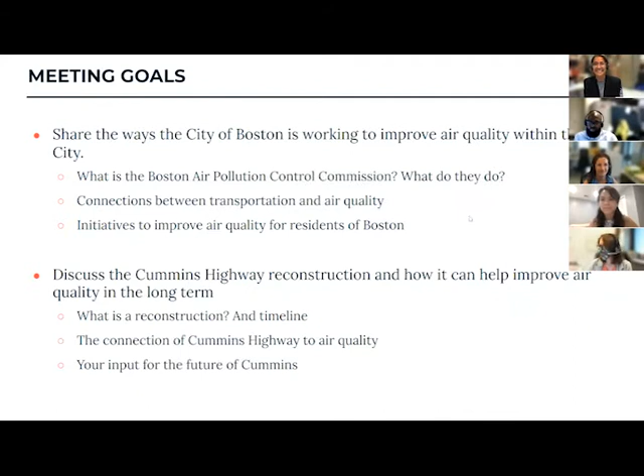So I'll pass it to Kat to tell us a little bit more about the Boston Air Pollution Control Commission and the Environment Department. Thank you.

So the Air Pollution Control Commission is an entity that sits in the Environment Department, and we do a couple of different activities, but all related to reviewing, permitting, and regulating activities that relate to air quality and noise. So this includes parking in the parking freeze areas. So those are programs in effect in downtown, South Boston, and East Boston, but also permitting and enforcement related to idling in partnership with some other city agencies.

We also review abrasive blasting and chemical cleaning permits for buildings. So if you had painted brick on a building and you wanted to clean that off, you might use chemical cleaning or abrasive blasting, and that's the kind of permit, because that can release some air pollution. And then the third kind of activity is sometimes things like open burning or smoke from industrial sites.

And so some things that we do in Mattapan: we respond to noise and pollution complaints. We also respond to requests for putting up anti-idling signs. So if you have a location where you see somebody idle consistently, we have a form where you can request us to deploy an anti-idling sign. We also have a community clean air grants program and provide information about zero emission vehicles. So just a couple of the different things that we do around the neighborhood. Next slide.

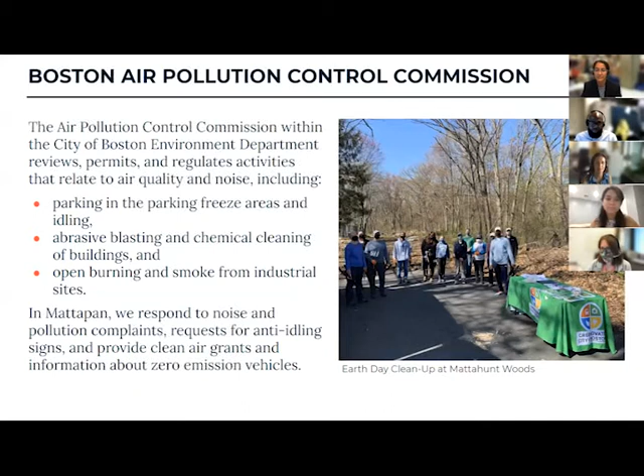More generally, so we're within the Environment Department. We're so green and environmentally friendly that our lights just turn off automatically. So sorry if I'm a little dark right now. The motion sensor does not know that I'm here.

So in the Environment Department, there are a couple of different programs that work to enhance the quality of life in Boston. So we do that by protecting our air quality, our water, and some of our land resources. We also take action to address climate change. So Boston as a city is committed to reducing carbon pollution that contributes to climate change, and we're committed to preparing for the impacts of climate change. And so all of this is so that we're building a city that's more sustainable, that's resilient, and that's healthier for generations today, but also tomorrow.

And so some of our main programs are Carbon-Free Boston, which is all the work that we're doing to reduce greenhouse gas emissions and air pollution that contribute to climate change. There's the initiative Climate Ready Boston, which is all about preparing for extreme heat, sea level rise, and flooding. If you're at the previous conversation, you were talking to some members of my team who are on the Climate Ready Boston side about the heat resilience study. And our third major program is Zero Waste Boston, which is all about increasing waste reduction and doing reuse, recycling, and composting, so that we're sending less and less to incinerators that emit harmful air pollution, and instead creating a more healthful economy.

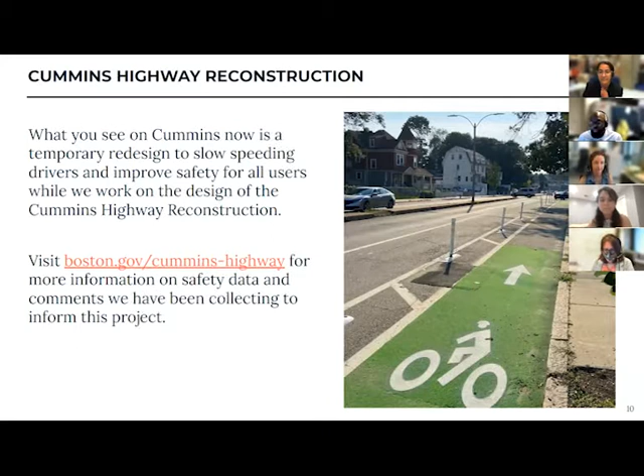Hello everyone. To talk about Cummins Highway a bit and give you an update on what you're seeing right now, it's actually a temporary redesign to slow speeding drivers and improve safety for all users while we work on the design of the Cummins Highway reconstruction, not only with the community but with other interagencies within the City of Boston. For more information, please visit the boston.gov Cummins Highway website to see the safety data currently available, as well as the comments we've been collecting to inform this project since the beginning.

So to talk about why we want to reconstruct Cummins Highway: it has been unchanged since the spring of 1955. At that time, streetcars ran along Cummins Highway, and they were removed in 1953 to make room for cars. The current street layout reflects the priorities of the 1950s, which enabled non-residents to drive quickly through neighborhoods if they were coming from the suburbs into downtown. A route like Cummins Highway was a priority, which is why they wanted to maintain the four lanes of travel.

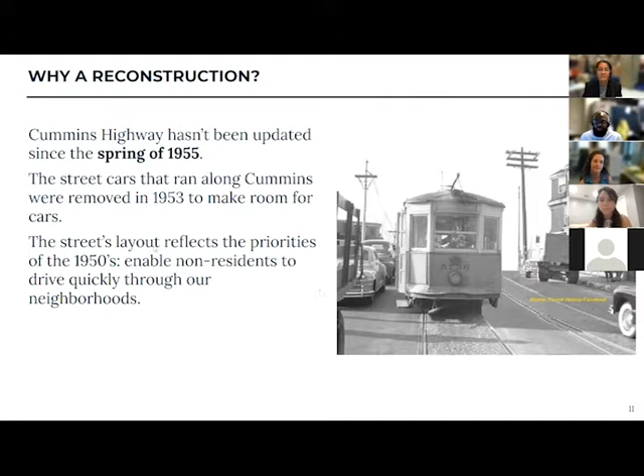Next slide, please. So during the reconstruction project, what we plan or are hoping to do on Cummins Highway is completely rebuild the street, including the sidewalks, curbs, street lights, traffic signals, and roadway pavement. Also, what's actually happening right now is National Grid is replacing and updating the utilities along Cummins Highway. Boston Water and Sewer Commission have already completed their work, I believe a few years ago, so we're currently just waiting on National Grid to finish. As soon as they get out there, I know that'll make everyone happy.

The city has budgeted approximately $12 million for the Cummins Highway reconstruction project, which we have not yet started spending. We're still working on community engagement and design, but that's the money we have ready, budgeted, and invested for this neighborhood in this project.

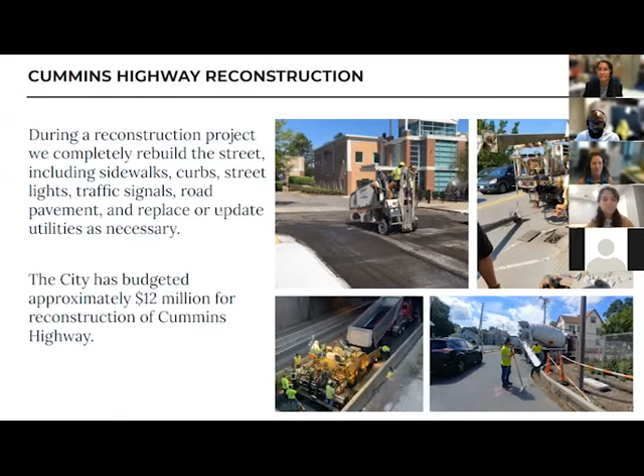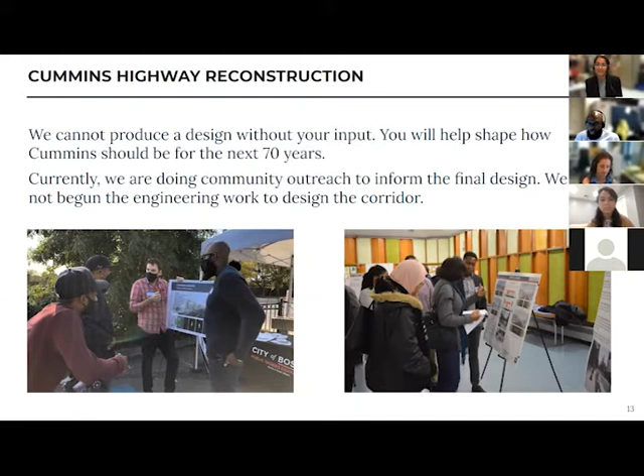In regards to the Cummins Highway reconstruction project, we are not producing a design without your input. We're out here speaking to residents because we want your help to shape how Cummins Highway should be for the next 70 years. We're currently doing community outreach to inform the final design, and as I've mentioned, we have not begun any engineering work to design the corridor or spent any of the $12 million in construction funds.

When we look at the opportunities for Cummins Highway, one of the initiatives the city has looked at is Go Boston 2030. One of the goals of that initiative for the Cummins Highway project is to improve safety on our streets, reduce emissions, and invest in communities to achieve equity in access to opportunities.

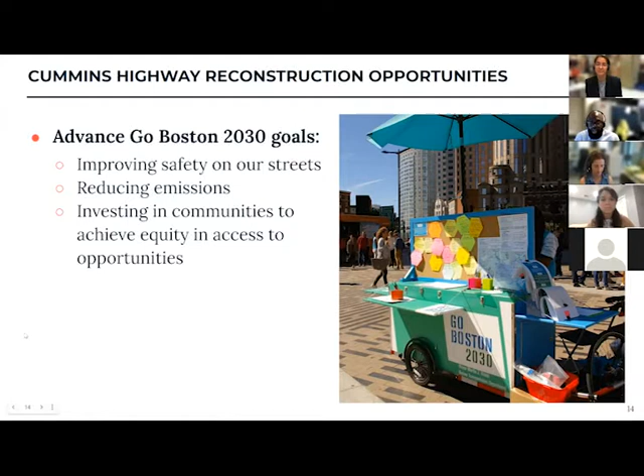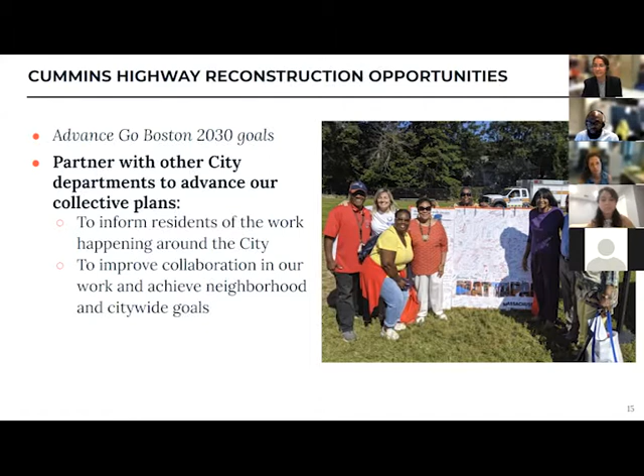Part of that is partnering with city departments to advance our collective plans. We're working with city agencies on the Cummins Highway project, and we work together so that we're hearing what residents and neighbors are saying and passing that along to other groups, whether it be the BPDA or BTD. We're working together to inform residents of the work happening around the city, improve collaboration, and achieve neighborhood and citywide goals.

Lastly, our collaboration with residents helps advance our goals. We want residents to be aware and to participate in the efforts they care about, and to confirm their vision for the future through our projects.

To give you a quick review of the timeline for the Cummins Highway project: it began back in 2019, well, the end of 2018, but our first community meeting was in April 2019. We had two subsequent community meetings, back when we were meeting in person at the Mattapan Community Center—one on October 29th, 2019, and the last in-person meeting on February 27th, 2020.

We did have a couple of pop-ups, I believe in October 2020. The trials we proposed and implemented on Cummins Highway began in July, and the second phase of the trial began in October 2020.

From June 2021 to ongoing, we're continuing our engagement for the design of Cummins Highway. We have a number of engagement opportunities lined up. Back in June, we had a special tea talk on mobility with Mattapan Food and Fitness, and we talked with Charles Brown in July.

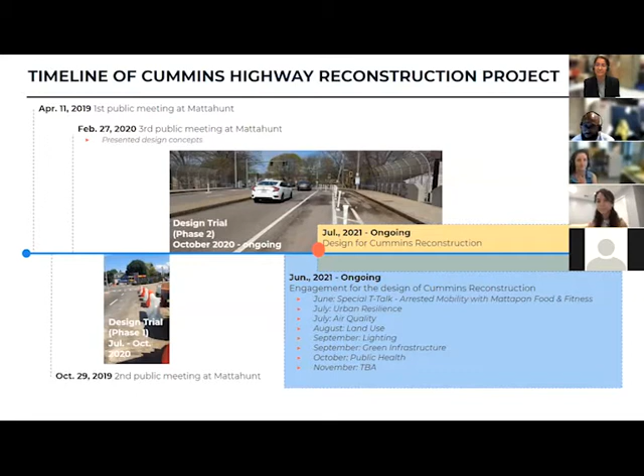Okay, so now we're going to set the scene with a little bit more about air pollution in Boston, just a little background for this conversation. So the first thing to know about air pollution is that not everybody is equally affected.

Suffolk County, where we live, is the most polluted county in Massachusetts. A lot of that comes from on-road vehicles, cars and trucks driving on streets, so we're getting a lot of that pollution in the Boston area. It's 88% above what everybody else in the state experiences.

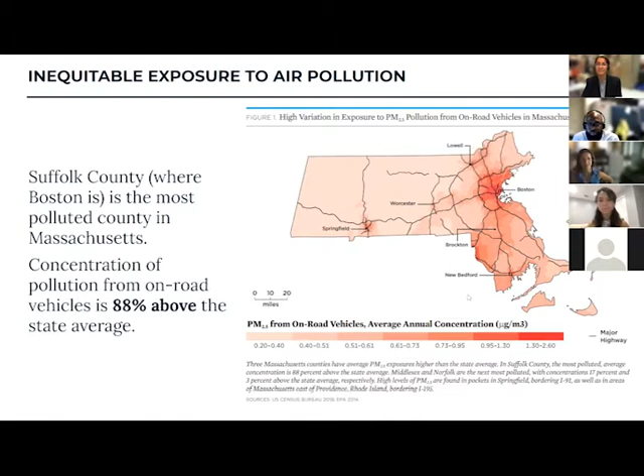In terms of who is exposed to air pollution, the people most affected are children, older adults, and people with pre-existing health conditions, like asthma or chronic lung conditions. It's also low-income communities and communities of color who are at higher risk for health impacts associated with living near busy highways or streets and other sites where pollution is emitted from multiple sources.

In Massachusetts, in our urban areas, air pollution disproportionately burdens low-income communities. In terms of health effects, a 2018 report ranked Boston 4th nationally for asthma prevalence. We have really high asthma rates in Boston, about 10% for adults and nearly 13% for children.

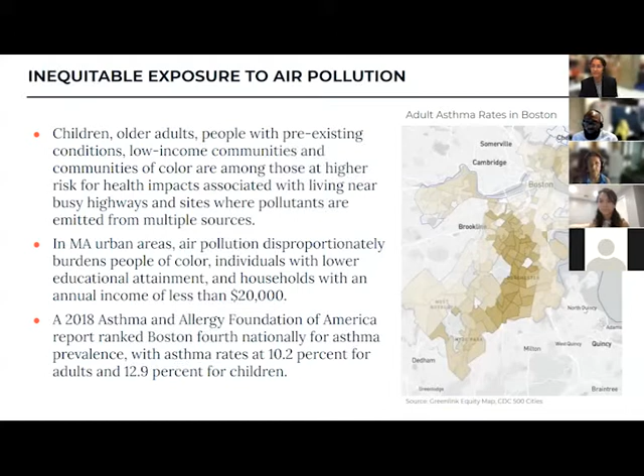In terms of where this pollution comes from and what it's causing, traffic not only contributes to air pollution but also to global climate change. When we look at where emissions from transportation come from, about 65% is coming from passenger vehicles—cars and vans, people riding in SUVs doing school pickup and drop-off and going to work. Those are private household vehicles.

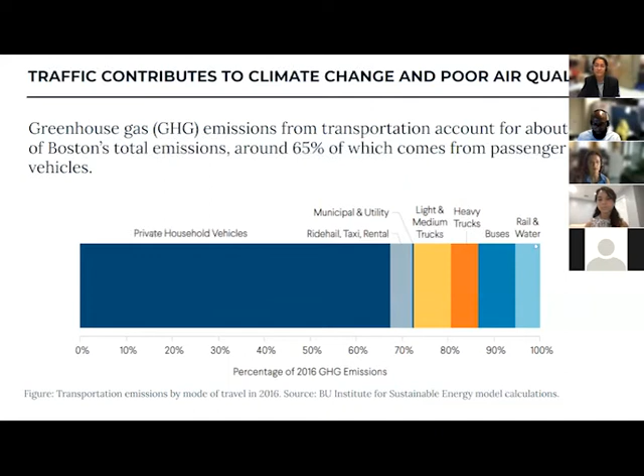The rest comes from taxis or ride hail, and trucks from the freight industry—getting food to grocery stores and doing deliveries—which accounts for about 10-15%. Everything we consider public transportation, buses, the T system, and ferries, is another 10-15%. But the bulk of it is coming from passenger vehicles, cars and SUVs.

In terms of how much the average passenger vehicle emits, it's about 4.6 metric tons of carbon dioxide per year. This visual shows what that amount of gas looks like—it's a lot. That's how much the average car emits per year. Think of a bunch of carbon dioxide, this invisible gas, concentrated into a box—it's about equivalent to what a household would emit. So it's a lot of pollution, and that's each car.

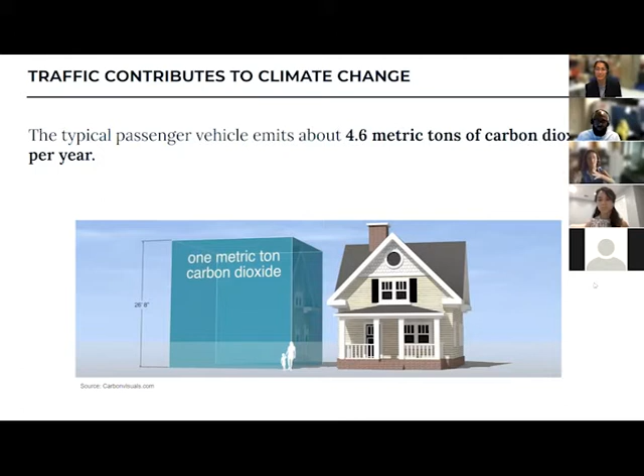In terms of what that pollution causes on the ground, the exhaust from motor vehicles contributes to forming a lot of different pollutants. When we burn fossil fuels in vehicles, you're combusting a flame, and not all of that actually gets consumed. Instead, it's an incomplete combustion, as they call it in chemistry class. So there are a lot of extra gases that still come out of the equation on the other side.

One of those is ozone. There's also nitrogen dioxide, as well as other things like carbon monoxide, particulate matter, volatile organic compounds, black carbon, and more. A lot of these different pollutants have slightly different effects on our bodies, and many of them are really bad for our respiratory system.

If you think about your throat and your lungs, pollutants can reduce your lung function. They can cause asthma, they can also cause things like lung cancer. Some of them can also make heart disease a lot worse and cause cardiovascular disease. So they all have slightly different effects, but it all contributes to some really negative outcomes for our bodies.

The exhaust coming out of your tailpipe is just one part of the pollution. The other part comes from the mechanics of our cars rolling down the street. As they roll, the tires get worn, the brakes get worn, and there's also abrasion on the road. All of that contributes a lot of particulate matter pollution, and when you think of smog in cities, a lot of that is particulate matter.

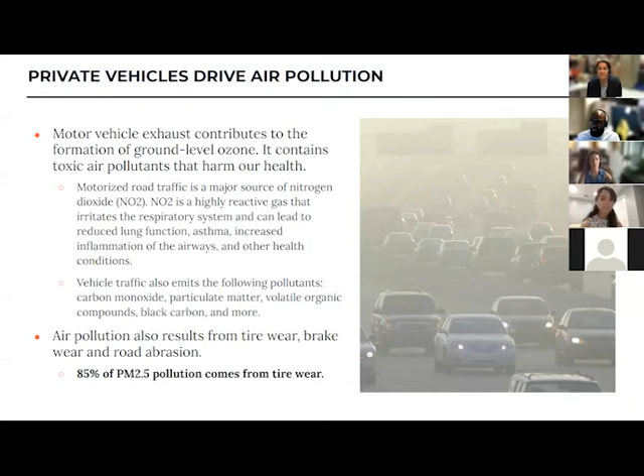So you have all these different gases. For particulate matter, nearly all of it comes from just the action of the tire rolling down the road at whatever speed they're rolling at.

In terms of the effects, if you're being exposed to high levels of particulate matter, that can make lung and heart ailments worse. It can cause asthma attacks, lung cancer, and it means we have a lot more people getting sent to the hospital. We also see increased mortality because of air pollution.

Ozone, same thing. It can cause respiratory issues. It can also cause a lot of nasty lung diseases like asthma, emphysema, bronchitis. I know my mom gets bronchitis pretty much every winter. I'm sure you know somebody in your life that has asthma.

In terms of what that causes for premature deaths, air pollution nationwide is causing more than 2,200 premature deaths every year just in our urban areas. So it is shortening lives today.

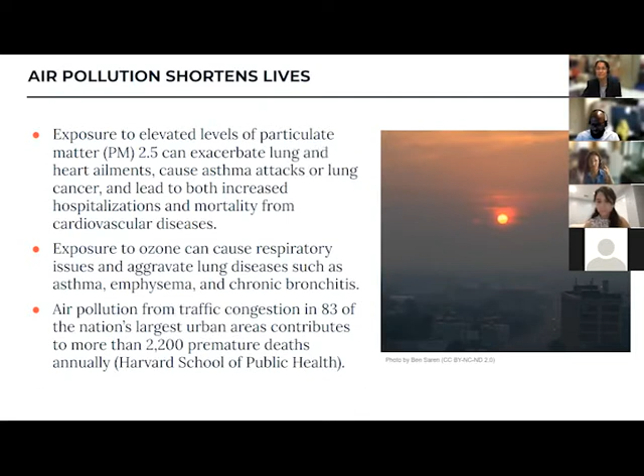What you see in the photo here on the right is not from the wildfires affecting our air quality yesterday, but from a few years ago, when wildfires in Quebec caused some really bad air quality here in Boston. That photo is from Boston, not Blade Runner. That's what we're already seeing today. Traffic pollution, wildfires, it's all mixing together and shortening lives.

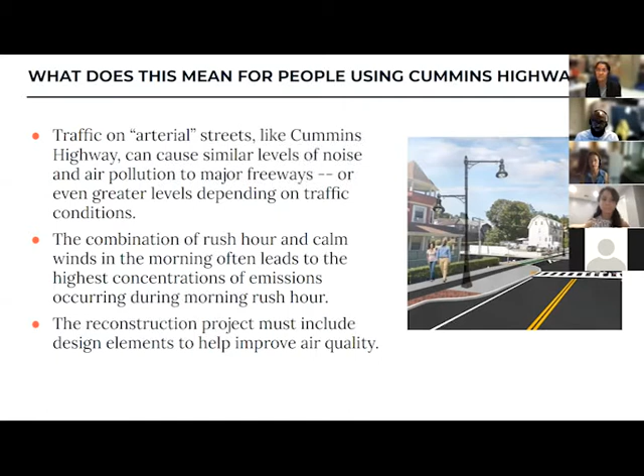So let's talk a little bit about how street design and air quality can interact. Next slide.

So there are a couple of different things that can have an effect on air quality just in our physical streets and how we design them. There is some research out there that suggests that if we lower the speeds, it either has a negligible impact—not much of an impact at all—or even a slight improvement, so that lowering speeds might actually slightly improve air quality in the area.

The other major way that we can improve air quality is by expanding active transportation. Having high quality sidewalks as well as bike lanes means that people are going to feel more comfortable, if you're doing a short trip, walking or riding a bicycle instead of taking a car. Having lower speeds makes it easier for people to walk and bike more. That's a great way to improve air quality, to just have that car trip not take place in the first place and to choose another mode.

It has to be said that the biggest benefit of lower speeds is that it reduces the risk of collisions and traffic fatalities. There is some evidence that suggests it can benefit air quality, but this is an area where there isn't a lot of really good research out there, especially not in Massachusetts or Boston, into the link between speed and air quality. So this is actually a place where there needs to be more monitoring and research to better understand how different design choices can affect air quality.

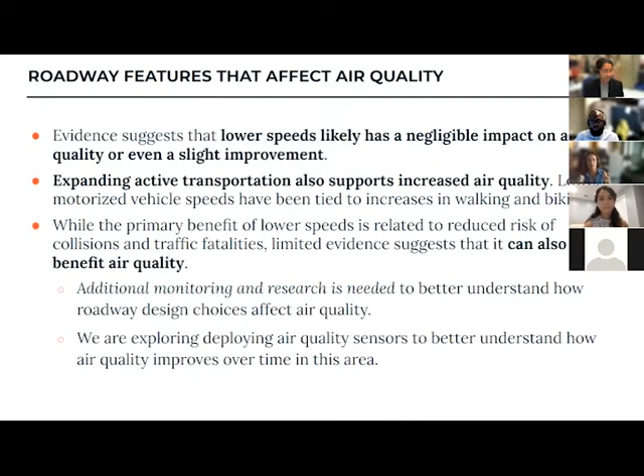One thing we would love to talk to you about tonight is that we're actually exploring putting out some air quality sensors to better understand how the design choices we make together might improve our air quality over time, and just understand what air pollution looks like on Cummins Highway.

There are some mitigation strategies that can reduce that traffic pollution. Two of them are roadside vegetation and noise barriers. Both of those can be really effective at reducing downwind pollution concentration. So if you have the wind going this way, but you have something like a tree blocking it in the middle, or a barrier, you're going to stop a lot of that pollution from getting over to somebody's home on the other side. Those can be really effective to help absorb and mitigate some of that impact, especially if you have a thicker barrier, or a tree and some shrubs, and a healthy canopy—that can really help reduce the amount of pollution that gets into a neighborhood.

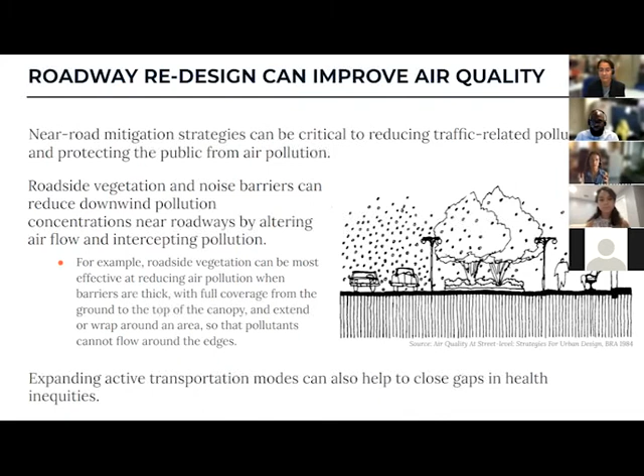There's also a lot of really good evidence in healthcare policy and health research that indicates that if you expand active transportation, you're also going to help close other gaps in health inequities. Just having that active mode and encouraging people to walk and bicycle can also help, in addition to reducing air pollution.

So in terms of what is contributing a lot of this pollution, I'd already said that 65% of our transportation emissions come from cars and SUVs. Not all types of vehicles emit the same amount. What the data tells us is that pretty much anything emits less than if you're driving alone—walking, biking, riding transit, or carpooling all emit much less than driving alone.

The other thing to think about is that electric vehicles, which are a great solution to reduce tailpipe emissions from a car, don't eliminate emissions. That's because of the tire wear, brake wear, and road abrasion that I talked about before. So electric vehicles get rid of tailpipe emissions, but you'll still get a lot of particulate matter, which is that form of pollution that can really affect your lungs. Electrifying our vehicles isn't a silver bullet—we can't just electrify vehicles and forget about the problem, because the cars will still be rolling down the street and still causing pollution.

The other thing to think about is how big these different modes are. If you're riding a bus or a train, 25 people riding in a train car emits about a third as much as 25 people driving alone. So even if the bus or train might be running on diesel, they're still emitting a lot less than 25 people driving alone, especially if they might be in an SUV. So some food for thought there.

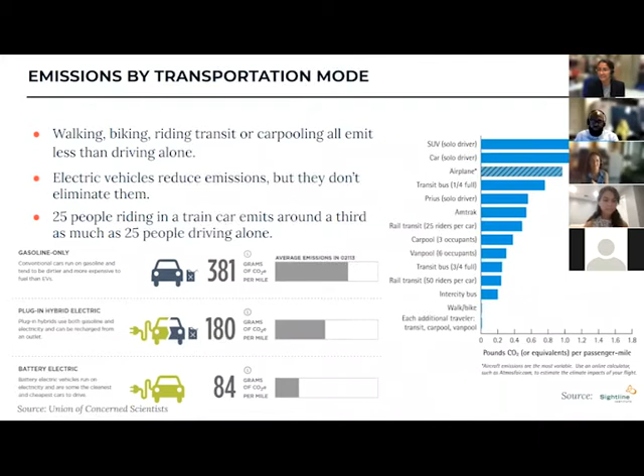So just some other pieces of the pie, some other things that are changing how emissive, how much pollution cars are putting out. The United States Department of Transportation has been setting fuel economy standards for cars and trucks since 1975. These are known as the CAFE standards. The idea is that you're reducing energy consumption and emissions by increasing fuel economy, making sure you can get more miles per gallon.

Over time, the average fuel economy of vehicles registered in Boston has improved. But the other piece is that people are driving more. Boston has been growing a lot. There are a lot of people, a lot of jobs, a lot of activity, and people want to drive to their jobs and go about their lives. So while we're seeing mileage get better, we're also seeing vehicle miles traveled increase. That actually means that over time, our transportation emissions have not decreased, since we started measuring them every year in 2005.

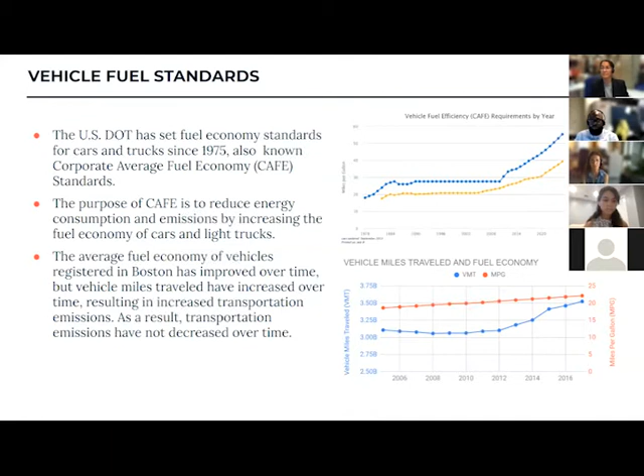So something else is going to need to change if we're going to reduce our transportation emissions. We can't just rely on fuel economy getting better. Next slide. I'm going to go through a couple of different initiatives that are working to improve air quality, both in Boston and in Massachusetts.

Next slide. So in Boston, zero emission vehicles are part of the puzzle. That can include things like electric vehicles, also things like electric bicycles. Our initiative is called Recharge Boston, and that webpage has a lot of information, things like how-to guides, information about state or federal incentives and grants that you can get.

We're also working to deploy public EV charging stations across the city of Boston. We're actually currently constructing a charging station in our municipal lot over on River Street, pretty close to this corridor. For context, charging at a municipal lot is about 25 cents per kilowatt hour, so that would be about $7.50 for a 100-mile charge on a 2020 Chevy Bolt. $7.50 to be able to go pretty darn far.

I did want to reiterate that EVs are great for reducing urban air pollution, but they don't completely eliminate it. That's because of road abrasion, tire wear, and brake wear, which are still contributing to those non-tailpipe traffic emissions and still contributing to bad health effects. So not only do we need to electrify, but we also need to be shifting from driving alone, single occupancy vehicles, to sharing our vehicles and taking active modes as much as possible. It's a both and.

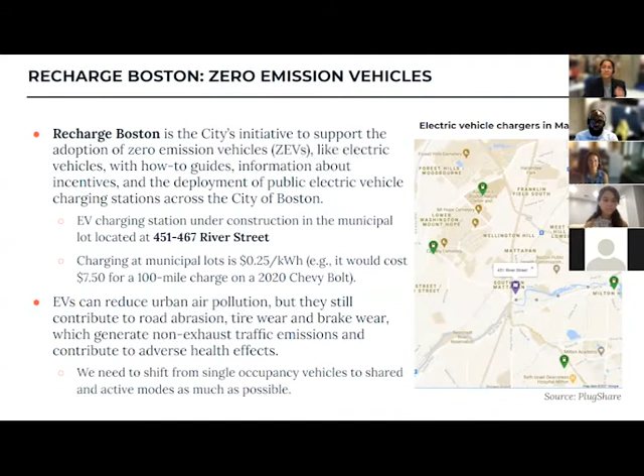Next slide, please. On the left here, you have an example of what an electric vehicle charging station looks like. We have a couple already deployed, and the one in Mattapan on River Street is one of the next ones that's due to be completed very soon, we hope.

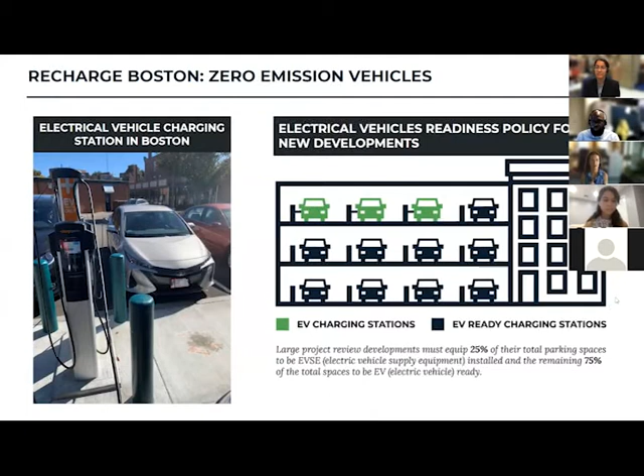One of the other things we've done as a city is adopt a new policy for new developments. Large buildings going under construction, and any building in the parking freeze that wants to deploy new parking, has to make sure that 25% of spaces are EV installed, where an EV could drive in today and be able to charge their vehicle. The remainder has to be EV ready, so that buildings are ready for a world where we're transitioning fully away from gas and diesel vehicles and are just 100% electrified. That policy has been in place for a couple of years, and we've had a lot of new developments already starting to comply with it.

Next slide. Some other initiatives happening at the state level. Massachusetts was part of the Volkswagen Settlement Fund. Volkswagen sold about 14,000 cars in Massachusetts that were designed to cheat on emissions tests, and were actually emitting way more pollution than they said they were. Massachusetts sued along with a bunch of other states, and we received $75 million to reduce pollution, as well as to support the electrification of our transportation.

There's a couple of different programs. The Mass EVIP, the Electric Vehicle Incentive Program, provides grants for public entities and grants for installing charging infrastructure at apartment complexes, workplaces, and more. So you don't have to be a city government in order to benefit from that - your condo building might be able to benefit from that.

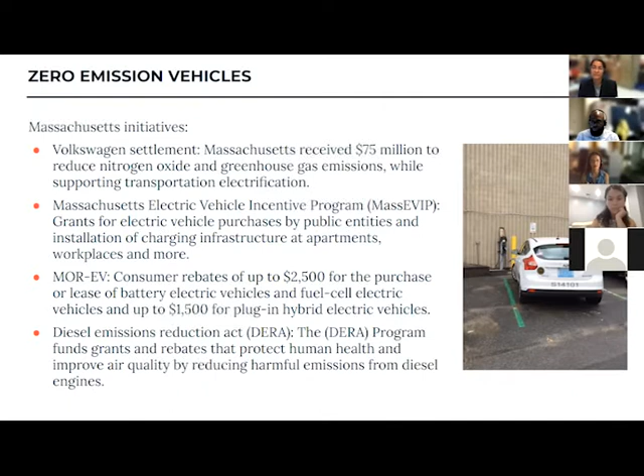There's also a program called MOR-EV, which is all about providing consumer rebates. Whereas the other program was grants, this is rebates upon proof of purchase of an electric vehicle - up to $2,500 for a battery electric vehicle and up to $1,500 for a hybrid vehicle. The third program funded through this is DERA, the Diesel Emissions Reduction Act, which funds a couple of different grant initiatives, generally working to improve air quality by reducing diesel emissions.

We're also working to have all of our vehicles comply with post-2007 EPA standards. The Environmental Protection Agency set higher standards for diesel vehicles after 2007. So even if we have an older vehicle, we've been working to retrofit them so that they have scrubbers that can scrub out all the pollution from tailpipe exhaust as much as possible.

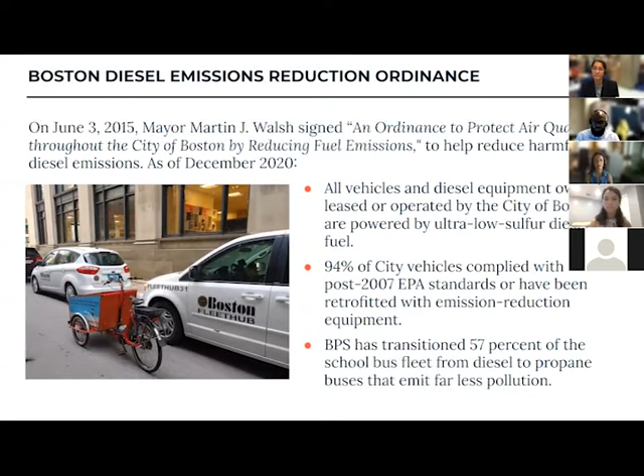We're also working to transition our Boston Public Schools school bus fleet away from diesel. We've already transitioned about half of our fleet to propane, and propane buses emit far less pollution than a typical diesel school bus, so our kids will also be riding on cleaner buses.

On the flip side, we've been talking a lot about cars, but pollution also exists in our homes. The Boston Public Health Commission has a program called Breathe Easy at Home, where doctors can refer residents with asthma for a home inspection. There are a lot of things that can cause asthma in your home, things like mold, dampness, water leaks, pest infestations, drafty doors and windows, bad heating or ventilation, and damaged carpeting. All of that can contribute to asthma in addition to traffic pollution.

The way that works is the Boston Inspectional Services Department goes to the apartment, visits it, and then landlords have between 24 hours and 30 days to correct whatever issue was identified in the inspection, under the sanitary code. If they find a violation, the landlord is required to take action to address whatever issue may be happening.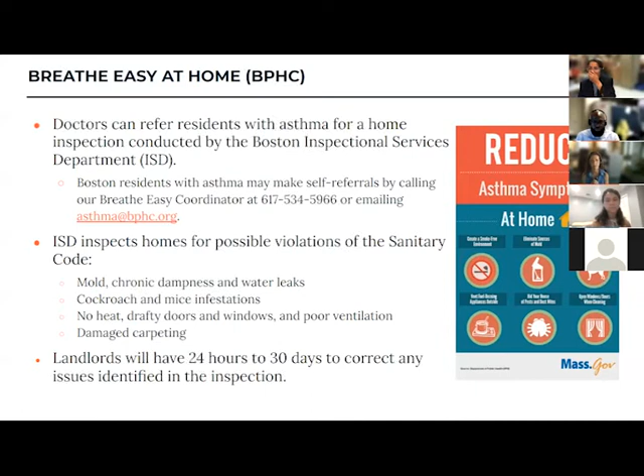Another newer program, through the Air Pollution Control Commission, is our new Community Clean Air Grant Program. The idea is funding and bringing visibility to community projects to reduce air pollution and carbon emissions. The grants are available for up to $50,000 per grant, and we have $350,000 allocated for this first year. We want to have conversations with people and hear what ideas they have to reduce pollution in the neighborhoods or improve local air quality in other ways.

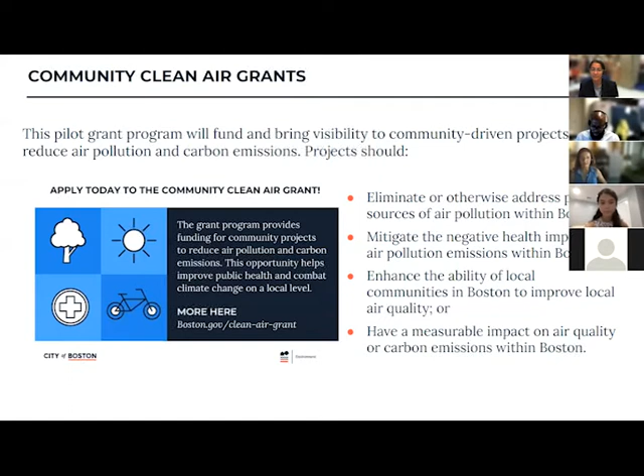We're hoping to make this an annual grant program that's always available for community partners to continue their good work improving our air quality. So again, we have $350,000 available this year, up to $50,000 per grant, and nonprofits, businesses, or individuals can all submit applications. Those applications are available in multiple languages and can be submitted and reviewed with feedback provided in language, so even if somebody doesn't speak English, they still have access to this grant resource.

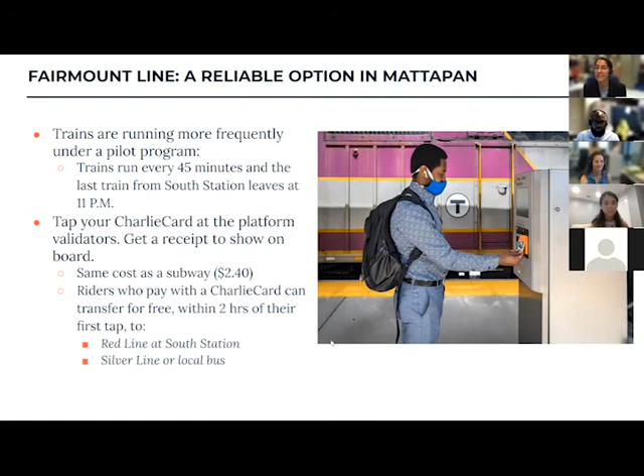Sorry, and I forgot to mention, if you didn't know, there's a Blue Hill Ave station very near Cummins Highway, which has an entrance there, as well as on Blue Hill Ave. And then there's other buses nearby.

I know that a lot of these buses were affected by the pandemic service level reductions. We just wanted to provide an update that all the buses traveling on Blue Hill Ave as well as on Cummins Highway are back to pre-pandemic levels. Most of them are running at 100% or even better than before COVID, from what I've heard. But some of them are lagging, because the MBTA didn't have enough operators, so they're currently training new operators to get these buses to 100% on a more consistent basis.

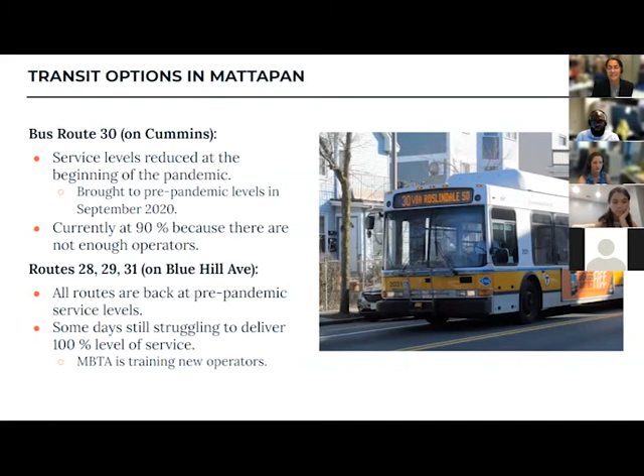A little bit about monitoring, since we mentioned that we were exploring putting in air quality sensors. Just wanted to share a little more about how that works. While some scientific evidence suggests that lower speeds can support active transportation and benefit air quality, there does need to be more data monitoring and research to understand the relationship between roadway design and air quality.

What's great is that air quality sensors are increasingly becoming more available and low cost. There are a lot of different kinds of sensors that measure different things. There are optical sensors, which can measure particulate matter. An example of that are PurpleAir sensors, which create an online map where you can see the sensor data, if somebody has a purple air sensor and is willing to list it for free—that's just publicly available.

I pulled up a couple of the sensors in the area near Mattapan, and you can see that yesterday there was a big spike related to the wildfire smoke we've been getting from the West Coast. It can also show the daily peaks and valleys—days where we have better air quality, days where we don't have as good air quality. There are also some indoor air quality sensors, but purple air is just one type of inexpensive particulate matter sensor. There are other kinds of sensors that can measure different pollutants.

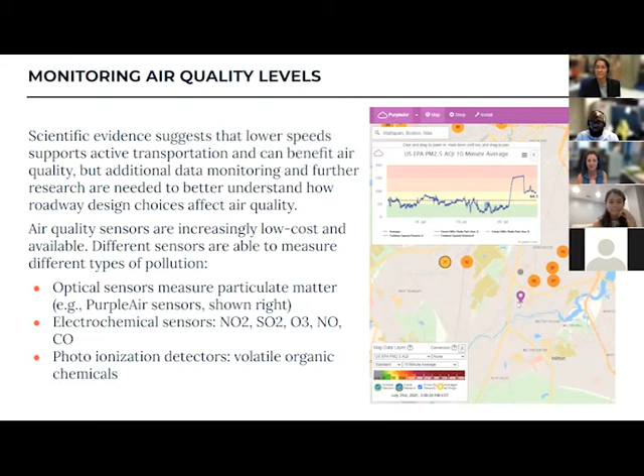Thank you, Kat, that was a lot of good information. We wanted to provide this background information to then hear your input on the future of Cummins and how we should be incorporating and thinking about air quality as we think of this redesign of Cummins Highway, which, as mentioned, once we replace it, will be the first significant change since the last time Cummins was touched in the 1950s.

And if we do it soon, it's going to be another 70 years at this rate. So we want to make sure we're thinking about all these different components that not only the city is working on, but that residents are interested in—not only for the people that are there now, but for the people who are going to be living in our city in the future.

This is not the only conversation about the redesign of Cummins Highway. This is a continued series in which we focus on certain topics, and you can give us your input. Through these discussions, which are in this informal way, it will inform the design of Cummins and the engineering. Anything that you share with other departments, such as the BPDA or the Environment Department, or any other conversations, we are in communication with everyone, and that would also get to us and inform the work.

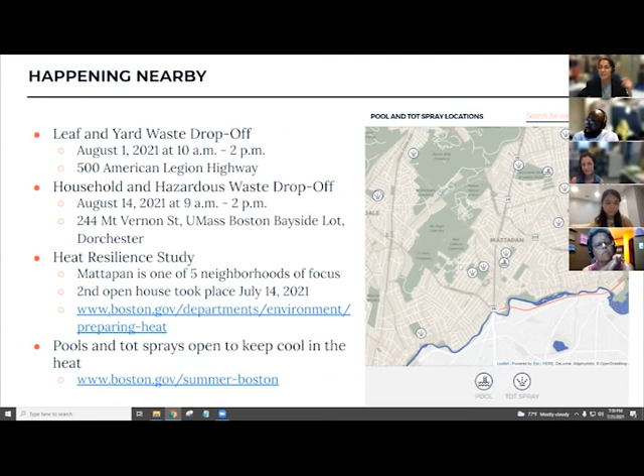We talked to the folks at Parks, and you might have known that the Walker Playground is under construction. It started in June, with a few delays because June was very wet. Seems like July might also be wet, but they're progressing through demolition and utility work. If you have any questions, you can contact Lauren Bryant, and I'll drop her contact info and the website for this park in the links right after I'm done.

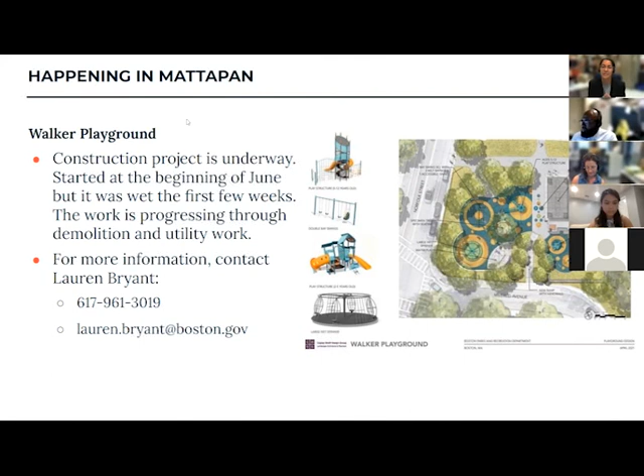Next, what else is happening? You can see me at Mattapan on Wheels on Saturday, 8 a.m. sharp. We'll be at Ryan's Playground. This is a great event hosted by Mattapan Food and Fitness and their Vigorous Youth program. Registration is required, and there'll be 3 different rides around the city, but also they'll be heading to Quincy, I believe. The city of Boston, Boston Bikes, provides bikes and helmets, so if you don't have one, we can get you one so you can ride.

There's also beginner-friendly bike rides on the Neponset River Way at the Mattapan T stop. They depart every Monday night at 5:30, and that way you get to explore the Neponset River Greenway and meet some of your neighbors.

And then that bike lady is also doing Tuesday tune-ups. It's every other Tuesday, 5:30 to 7:30. The last one was yesterday at the Mattapan Library, which I just mentioned also has a fun Wi-Fi drop by or pop up. The next one is August 3rd at Almont Park.

Next, if you don't know how to ride a bike, we also have a Women's Learn to Ride program. We had our first class this summer. Last year we couldn't do it because of COVID, but last week we had our first one at the Mattapan Elementary School parking lot. Our next one is next week, July 28th, again at Mattapan. The class is already full, but you can always sign up for the waiting list in case somebody drops, and we can contact you to come.